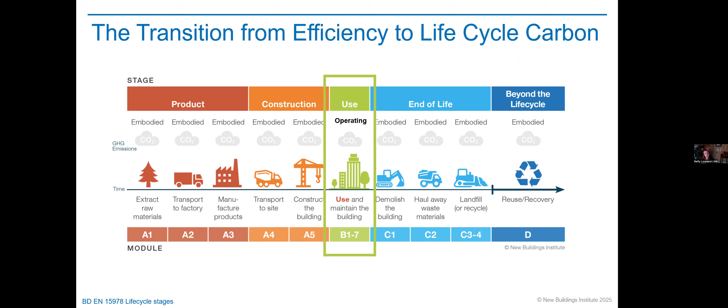So here's just a view of the different stages — operational carbon is just one little slice of a huge pie. And just in case this isn't a familiar concept, this is where I get to see people go, yes, I've heard of this before.

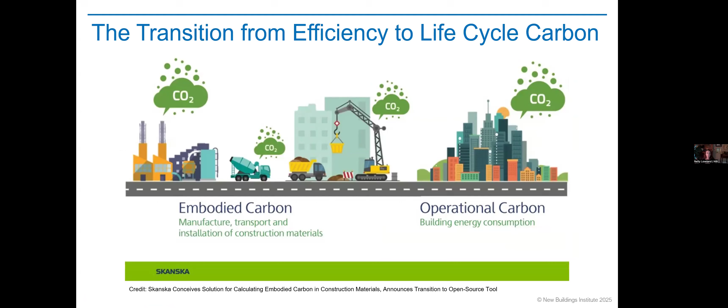Embodied carbon is the manufacturing, transport, and installation of construction materials, whereas operational carbon is the building energy consumption. I love this graphic.

Decarbonization is at the root of what NBI does, and it just refers to reducing or eliminating carbon emissions associated with buildings. That can be with low carbon building materials, energy efficient design, transitioning away from fossil fuels, using renewables, etc.

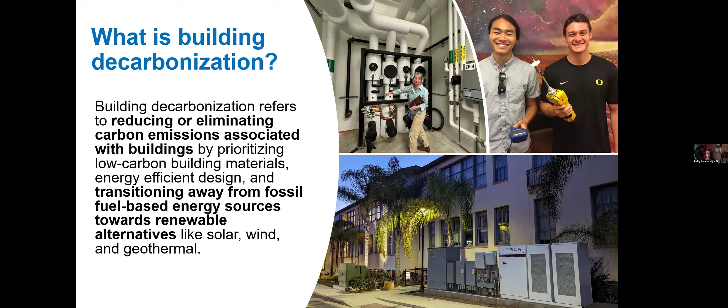I like this graphic for this explanation in case this is new, or people are still getting on board with this. You can see a typical building connected to the grid, with maybe a mix of renewables, fossil fuels, natural gas, etc. An efficient building has the same setup, but it's been arranged in a way that's more efficient, so good on them. But they're probably still using natural gas and pulling from the grid, which has some dirtier fossil fuels on it.

Then there's an all-electric building, which is efficient. There's no natural gas, but it's still pulling from the grid, which has fossil fuels and thus is not fully clean. And then there's this beautiful decarbonized building, fueled by 100% renewable energy, clean grid energy, which is the goal for the state of Oregon. We'll cross our fingers on that one. It may also use things like on-site battery storage, on-site solar, etc.

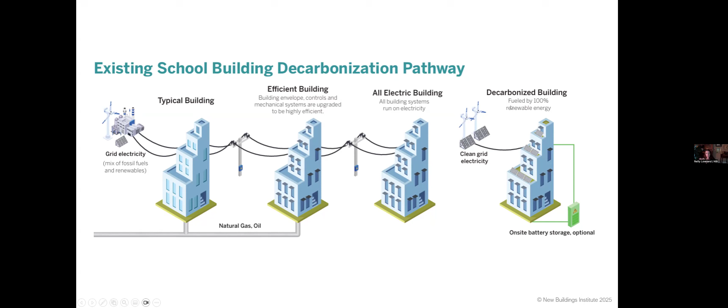I think this is a great one. I presented this to some middle schoolers the other day, and they were fully on board.

But here's the deal: when you work in schools, sometimes the 'D' word is not the best. Decarbonization is a really hard word for schools. I actually got some feedback recently — the word slipped out, I didn't even mean to say it, but when you work in that space, it happens. A school board member said decarbonization should not be used in this space. It's really hard to measure, and you have to break it down a bit too much.

So we use a lot of — and this was even pre the administration change — keywords like efficiency, cost savings, health, energy savings, resilience, student outcomes. I'll use decarbonization and maybe electrification a little interchangeably today, but know that when I talk to school districts, I almost never use it unless they've specifically pulled it out.

I'm curious though, what other words you all use to communicate things like efficiency and decarbonization to schools. Put that in the chat — it helps me throughout this too.

We'll start to transition our language. Greenhouse gas reduction — I like that.

We'll start to transition our language a little here, where these energy efficiency and decarbonization strategies really improve health. That's a big one that's really been a silver lining since COVID, but also a through line even since I was a kid.

So we always think about this. This is from the Department of Energy — the previous Department of Energy, but maybe the new one likes this too — where these 9 aspects of a healthy building: ventilation, air quality, thermal health, dust, lighting and views, noise, moisture, and safety and security, can all be addressed with energy efficiency and decarbonization strategies.

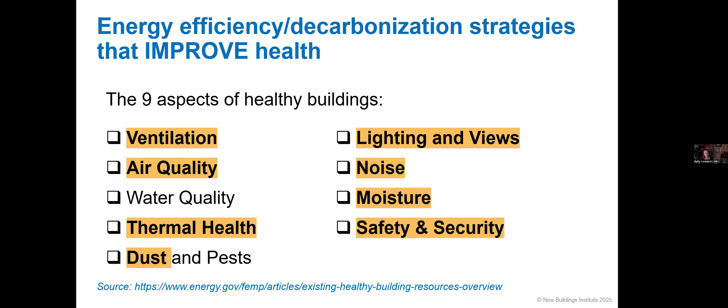Within decarbonization, that third building was the electrified building. So electrification is a really core strategy, and we actually focus a lot on that with school districts.

Electrification can be an easier sell, especially in places where energy is really expensive — electrification and efficiency is much easier to talk about there. We have pretty cheap electric on this coast, so this language always gets a little tricky.

But electrification is a really important strategy to address things like failing systems, to adapt to the climate, and to address any rising costs. And I know there's always a cost trade-off when you switch to electrification.

So for the purpose of today, I'm just going to talk about this more from the efficiency angle, that electrification and efficiency go hand in hand. And electrification is not always guaranteed to be beneficial or cost less. The approach really matters and is influenced by a ton of factors, like the timing of things, pre-planning, improvements to adjacent systems. Oh no, all of a sudden you have to do a huge panel upgrade, that's a lot more money. Or if you're in California, you trigger an entirely different review from the division of the state architect. Or there's just occupant or facility manager buy-in. There's all sorts of things. That is the case though for most construction, whether it's electrification or not.

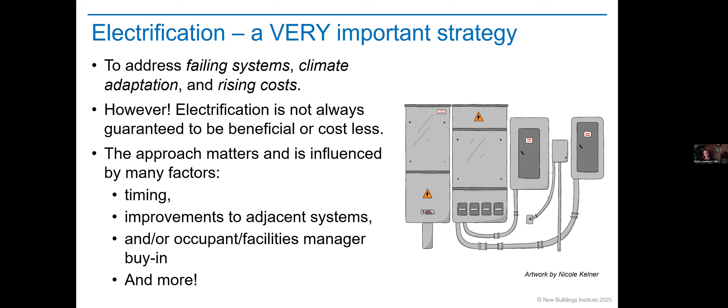So today we're also going to talk a little bit about planning for this kind of stuff, so that electrification can be done in a phased approach.

So I'm going to start talking about some trends. We work nationally, and I actually talk to probably 10 to 20 school districts every single week across the nation. So a lot of these trends, there are other trends I'm certainly missing from this list, but these are some of the key ones.

So federal momentum, even though the feds have pivoted a little bit, there is still momentum left over from before. There's still IRA tax credits for ground source geothermal. There's still sort of a high, like we were up there. We had Renew America's Schools, we had federal attention on schools. So even though it's not great right now, there was so much attention that there's really a belief that it can still come back. There are still a growing number of states and jurisdictions adopting net zero or all-electric new construction requirements.

That is really helpful. There's also states that are supporting school districts to do planning or implementation for net zero or decarb. Maryland has a bunch of grants for school districts doing decarbonization, Massachusetts as well. So that is really ramping up.

There's also this shift from green building being just a premium add-on, let's take it off the table, to it being more of a baseline expectation. It's going into teachers union contracts, administration, people are bringing it to the table. I had a superintendent the other day ask me, hey, have we done a lighting retrofit? And I was so excited.

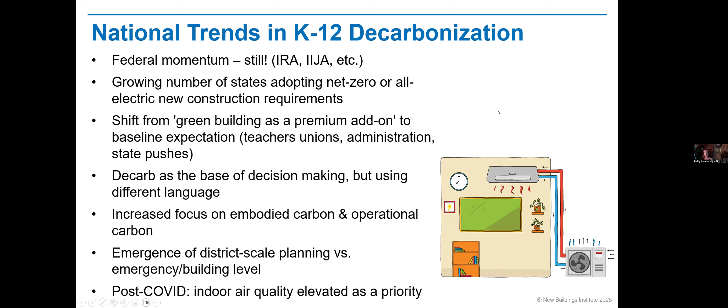And I mentioned this earlier, but post-COVID, indoor air quality has really been elevated as a priority. I've seen a lot of advocacy groups come out around this, locally and nationally. So it's great to see, we were on a little soapbox about HVAC and IAQ like 10 years ago, and it felt like no one was listening. And now people are listening. Who knew filters got so cool?

This is just a little view of, there's many jurisdictions all around the nation that are starting to adopt many of these ordinances and rules and benchmarking and all sorts of stuff.

I hope that number is right because I pulled this a while ago. It might even be higher at this point.

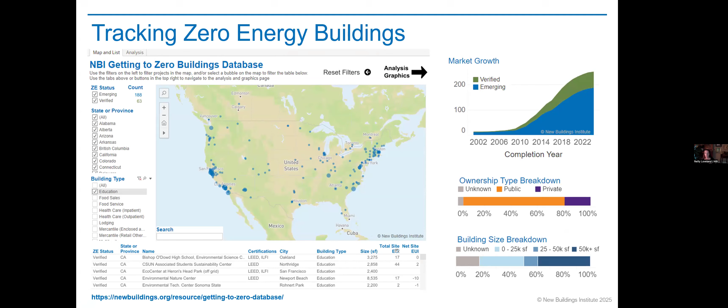At NBI, we actually track these zero energy buildings. We've been doing that for over a decade, maintaining a database you can sort by state or building type, and schools are in there. A subset of my schools team tracks climate school district and zero energy or efficiency building commitments. There's always more being added, so if you don't see a school district you work with on there that should be added, please email us. The link is on there, and I'll drop these links after this too.

Focusing in on Oregon, since this is the Oregon COTE, I'll talk about the Oregon decarb landscape from the buildings and people side, and then the policy level side. For someone who lives in Oregon, I don't do nearly enough work in this state, so I might be missing things.

Across the board, students are pushing for efficiency and sustainability. Their voices are loud and they want to help. They're interested in things like tracking - I got contacted by a high schooler the other day who wants to set up a benchmarking profile on Energy Star Portfolio Manager for her school.

We're also generally relatively mild climate-wise. We're not like Minnesota, for example, so it's a little easier for us to achieve some performance targets.

Much like many places, we have an aging building stock, so there's a huge need. There's also the complementary need of air conditioning in buildings ASAP because our climate is changing - it's getting warmer and more school days are closing for heat. We're obviously not the only ones, but that's present in many folks' minds.

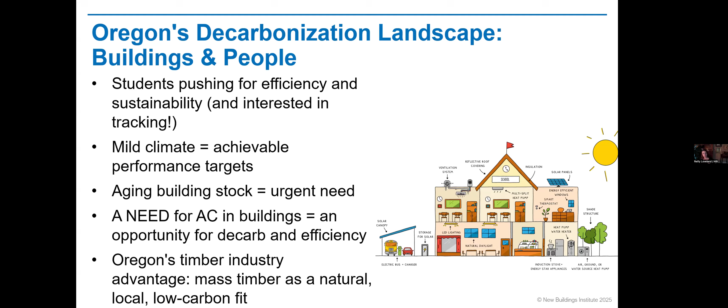Also, Oregon's timber industry is an advantage since we have mass timber as a natural, local, low carbon fit. I'm not a mass timber expert, but I do have one in my immediate vicinity if we need to talk to somebody.

Then there's the policy and program landscape. Oregon has statewide carbon reduction goals and a clean energy vision which talks about electrifying our grid and all sorts of stuff. I should have that on there, but it's like HB 2021 or something like that.

We also have an energy efficiency specialty code that requires more high efficiency work in commercial buildings. What's really cool to me - not that codes aren't cool - is that the Oregon School Board Association really encourages sustainability policy adoption. They put stuff on their website about when school districts adopt an energy policy. That's a really unique thing we have in this state.

The Oregon Department of Energy has K-12 technical assistance and grant programs. We have local utilities offering incentives aligned with decarbonization or electrification. We have the Energy Trust of Oregon - we're super lucky to have that - and they have a new buildings program and an existing buildings program, both with incentives.

In the Portland area we also have the Portland Clean Energy Fund. That's a little different in how it's dictated, but it is an asset, so I'm putting that in the 'check, good job' column.

The one downside, since this was all good things, is that we have state level underinvestment in our school infrastructure. We're one of the states with the lowest amount of per student capital construction funding in the United States. There's a great report about that in America's Report Card that I can drop in the chat. It's always hard to see that, like, oh, our state could do better.

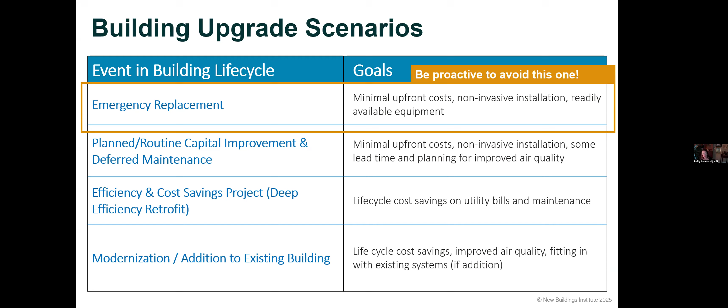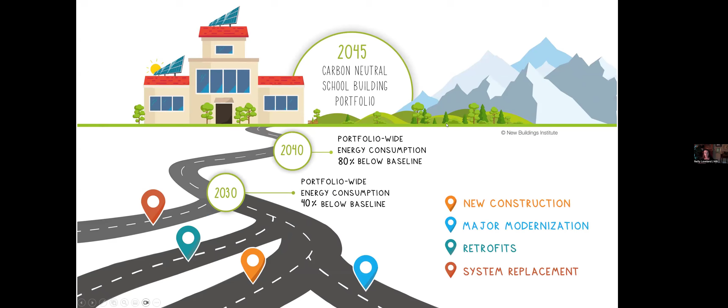So this is where I start to get on the soapbox, and I call on you all to help, because it's going to take all of us to help these school districts plan. This is sometimes the hardest part, and why I mentioned I get pulled in as a third party a lot: designers, you all must help districts articulate what they want before designing it.

What that often means is a lot of listening and repeating, listening and repeating. You can use things like visioning workshops, or showing how other peer districts are doing it to show that you understand. You could potentially do some scenario modeling. Really it's all about listening and reframing—reframing the energy and carbon goals you might think they should work towards, in language that the boards and communities understand and can champion beyond you.

That's the key, is give them the language so that you don't have to talk to everybody. And then always, by doing that, you can connect the building decisions back to the educational outcomes. We build the buildings for the kids and the outcomes, not to just stand as a building.

They're pretty most of the time, but that's not what they're for. We do have this document, the key messages for communicating about carbon neutral schools. That's a good one that has some of this key messaging if you're just getting started with folks, to frame how this looks and how the outcomes might look.

But regardless, when you're listening, you're trying to listen to what their language is. I'll tell you a quick story - I was working with a school district in Maryland recently, and their school district uses a basis of design document to do all of their construction. They asked for support to update it, put some sustainability in there.

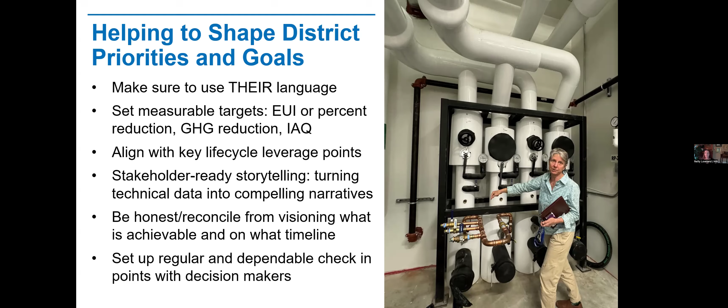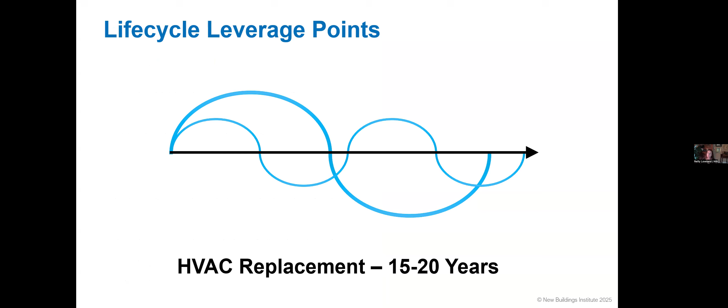So when I said life cycle leverage points, this is what I want to make sure gets aligned. These are not fully inclusive, but we've got major renovation roughly every 30 to 50 years, hopefully. An HVAC replacement might be every 15 to 20 - maybe longer, that's ideal, but we can be realistic too. A lighting retrofit maybe every 5 to 7 years.

Again, being realistic. But then there's all these other things that play into this, like bond measures, stakeholder turnover. I work with a bunch of school districts that have a lot of board stuff happen, and every time there's a full board turnover, it is a huge opportunity for improvement. We just hit one of those today, and I'm super excited about it - there's a new HVAC that I think is on the way.

So one of the ways, even though I put this second, even though I talked about priority planning - let's think about it this way: school districts need help putting together these portfolio plans. I know we're all for-profits trying to make money in theory, so it's a little hard to do that unless it's scoped, but there are ways to intervene early.

This is where I'm going with this: you can establish relationships with school districts, even if it's not part of an RFP, by helping them do things like energy audits or get some of that early data. Energy audits are often free from utilities - obviously Energy Trust exists in this state. So helping them access those is a great way to build rapport and a relationship so that the work around visioning and whatnot comes easier later. You're also more primed to potentially respond to an RFP if you know the folks.

A lot of them also need help benchmarking energy use and documenting their building systems. Sometimes that's in the form of an RFP, and that's great, but sometimes you just need to connect with them, get to know them, and help them document some of that stuff. I love doing that - it's a really fun way to get to know folks.

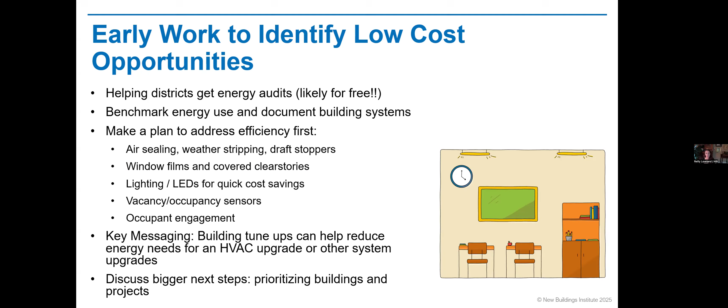I would be remiss if I did not talk about the loading order here, because I'm about to go into design strategies, but the low-hanging fruit seemed appropriate to put before that. Many of you may know this, but I always like to talk about it because I'm surprised how many people haven't really thought about this: loading order considers comfort and health first. That is the number one priority - thermal, acoustic, lighting, views.

So we really start these projects with load reduction via efficiency measures - it's like your efficiency vegetables, I'm sure most of you have heard that, I did not come up with it, I can't take credit for that. Then we look for additional load reduction using mechanical system selection and decisions with other equipment - you've already reduced your load, your HVAC might be smaller, and you're good to go. Then you get your renewable desserts - your EVs, your PV, and other renewables. Keep that one in mind.

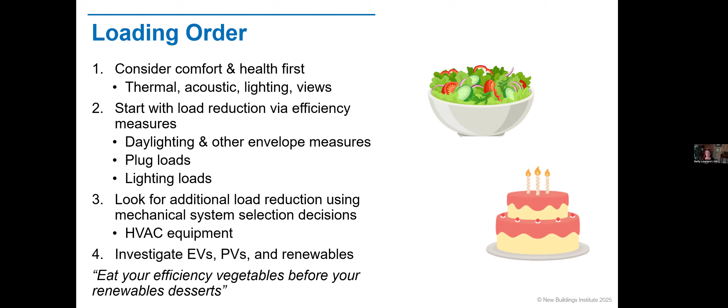It's a little bit of a funny slide to have in here because it doesn't exactly fit, but I wanted to make sure it was addressed before we go into the systems - because we're talking about establishing rapport, helping them plan, doing some early efficiency work with them, but now we move into the bigger project on the horizon. These are the three main building elements we're thinking about - this is that loading order bit, right?

There's the building envelope, which passively impacts building energy consumption. There's the building systems, which is the magnitude of the total amount of energy and greenhouse gas emissions. Then there's also the fun stuff - the renewable desserts, the on-site energy generation, etc. Just to show some of the systems that fall under that: building envelope is obviously the roofs, walls, foundation, windows, and doors. And building systems are your HVAC, water heating, plug and process loads, etc.

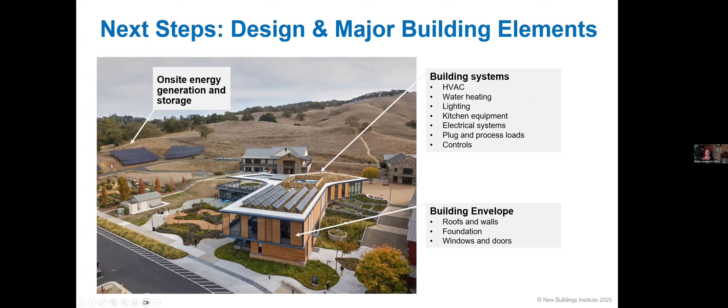I'll hit on a couple of these. This isn't going to be an exhaustive design meeting, so if you want to talk about more strategies, we can do that another time. But I wanted to hit on the envelope and passive systems first, because I think it's so important.

Some of these fall under low cost, like weather stripping. But high performance insulation is key, that helps reduce the overall load. Air sealing and thermal bridging mitigation, air tightness testing.

You'll see me bold stuff that is very important. Commissioning is clutch, also making sure the commissioning agent is not the same person who did the work. We've been running into that with a lot of schools recently, and some of the commissioning really fell apart.

Balancing daylighting benefits versus solar gain, especially in our climate zone or even sunnier ones. Passive solar orientation and design, and natural ventilation where applicable. There are actually some really great examples of that in this state. The Oregon Episcopal School is one of them, just right over here by me in the Southwest.

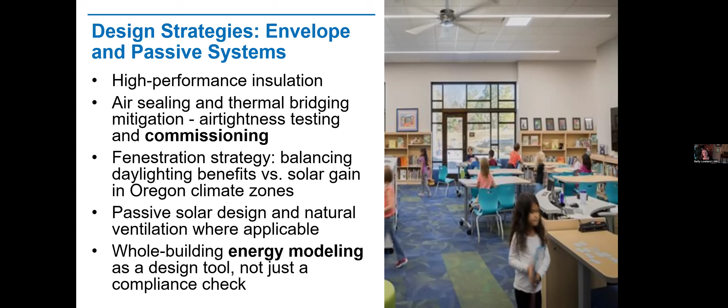Really using whole building energy modeling as the design tool. I try to get school districts to write that into every RFP and every design document, so I think it's really important. If it's not brought to you by the school district, I highly recommend saying, how about an energy model?

Moving from the passive to the mechanical, that's the second part I was talking about earlier with the building strategies. Heat pumps are great, they're a mature technology, they're school proven, they're all climate capable. There are cold climate heat pumps.

Dedicated outdoor air systems, DOAS, with energy recovery. There's obviously VRF systems, although I hear from a lot of people that VRF is dead to them and their facility managers, and that is tricky, but I totally get it. But there's the hydronic approach too, especially with refrigerants and where they might be going. There are different options there.

Demand control ventilation and real-time CO2 monitoring is great too. That is such a clutch one for making sure the indoor air quality is at that place where our students can still learn and think and do all of those things.

I put domestic hot water electrification and sizing in here because one of the funny things we run into is that in a lot of these older schools, the gyms and locker rooms were used for real showers a long time ago. Even if the showers are removed, sometimes these giant hot water heaters get left and they're just reheating constantly. So paying attention to sizing is a really interesting one.

Downsizing, obviously, in that case. Kitchen electrification and how to bring food service teams along in the process - I'm actually right now working on a big checklist for that whole process of kitchen electrification, so stay tuned for that. That should come out in the next month or so.

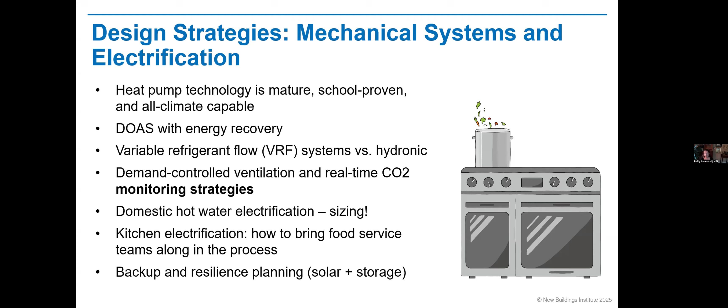And then just a quick nod to backup and resilience planning, thinking about solar and storage, especially when you're getting into some of these technologies. And I would be remiss if I did not mention indoor air quality.

I did want to draw attention to a really specific case study. We mentioned the shift in expectations since COVID. ASHRAE 62.1 sets those minimum ventilation rates - MERV filters, air change rates, CO2 targets. There are all great ways to manage these different things in existing buildings.

I know it could be tricky - you don't want to put a MERV 13 in an older system, but there are ways to do it, or different ways to bring in other systems that can manage the indoor air quality. Electrification is a win here if that's an option because it removes the combustion byproducts, so IAQ and decarb meet and become best friends.

I wanted to point out the IAQ dashboards here. This is tricky, because if you start telling people there's high CO2 in your schools, there can be some feelings. But Boston Public Schools has this great IAQ dashboard, and this woman, Catherine Walsh, is incredible and did a really good rollout of this. She addressed community issues - this is a star example of how you might do an indoor air quality dashboard, and overall it's been a great process that really united the community.

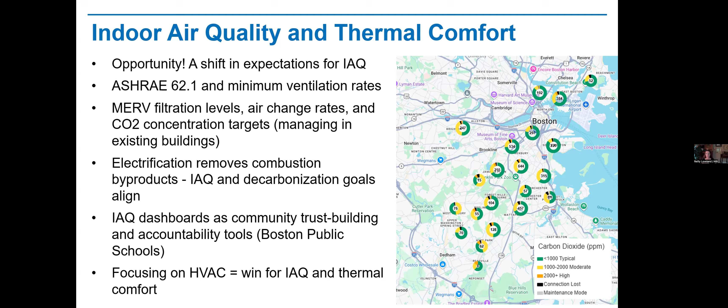I don't spend a lot of time trying to convince people that IAQ dashboards are the thing they should focus on, but if it comes up in conversation, there's a great example, and this woman Catherine is so willing to talk about it. Of course, when you have the opportunity to focus on HVAC, it's a win for indoor air quality and thermal comfort at the same time.

There are different ways to manage it: low carbon concrete, mass timber, low global warming potential insulation options. There are different opportunities here. EPDs, or environmental product declarations, are good for specifying carbon performance in schools. And I know that balancing embodied carbon reduction targets with the reality of school project budgets can be difficult.

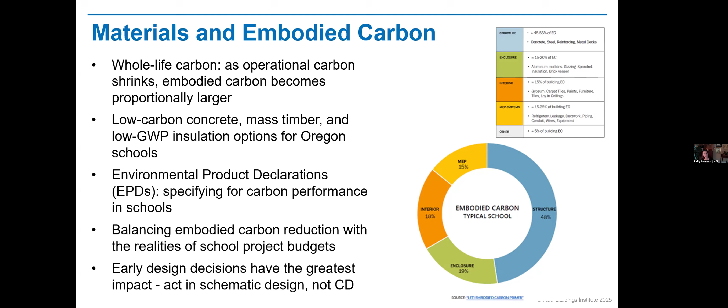So we're all just trying our best here, but it is something to certainly bring up, especially because Buy Clean Oregon exists. And early design decisions, this is that pre-planning thing, have the greatest impact on embodied carbon. So acting in schematic design is the way to make it as cost effective as possible. Okay, key takeaways.

That's really how I get in the door in a lot of school districts. Like I talked to a teeny tiny district in Michigan, Onaway, Michigan, and we talked about low hanging fruit and energy efficiency. And now we're really trending towards a bigger project.

Collaborating across disciplines. I know there's a couple of disciplines on here today. Mechanical engineers, energy modelers, contractors, utilities, everybody has a role to play. And you all, as designers, have this really critical role to help facilitate the transition with schools. So I just ask you to listen, respond, and support them. And again, if you need help, I am here too.

I have a couple of case studies. I know I'm a little maybe short on time, so I will do these pretty quickly, and then we can go to the Q&A part. I did really want to call this out. Is that okay, Elisa?